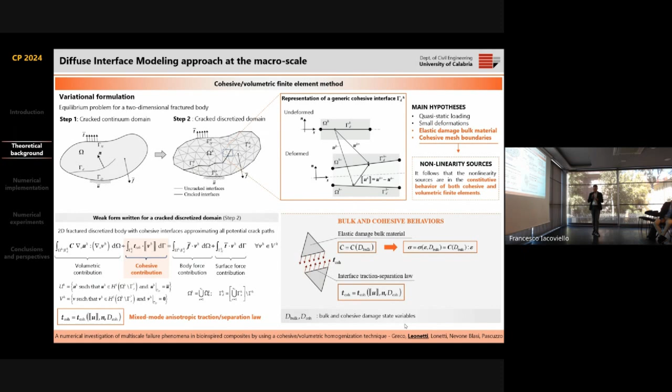In particular, the embedded interfaces are cohesive interfaces, which possess a general mixed-mode anisotropic traction-separation law. Anisotropic means that the TSL, the traction-separation law, depends on the orientation of the macroscopic crack. On the other hand, the bulk elements possess a general nonlinear behavior, such as elastic damage behavior and its anisotropic version.

So the main assumptions of the model are 2D periodic microstructure, well-separated spatial scales, quasi-static loading and small deformations, and a general nonlinear behavior of the constituents at the microscopic scale, so the scale of the microstructure. Conversely, at the macroscopic scale, we consider a homogenized damage model up to strain localization for the bulk elements, and the homogenized cohesive law for the embedded interfaces after the strain localization occurs. So that's why we call this approach a hybrid continuous-discontinuous multiscale model.

So for bulk homogenization, the micro-to-macro relations to obtain the overall constitutive behavior in the nonlinear range are rather well established. There exist some very known formulas, but there are no analogous relations uniquely defined for obtaining the micro-to-macro link for the cohesive repeating unit cell here used for homogenization purposes. The formula for the macrotraction follows a natural definition, obtained by enforcing equilibrium at the macroscopic interfaces, but there is no unique definition for the macro separation in the literature.

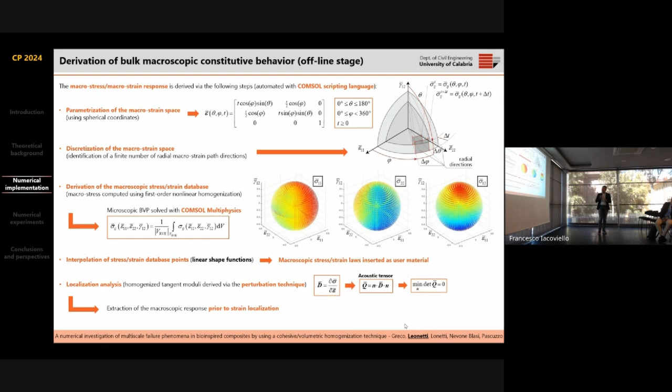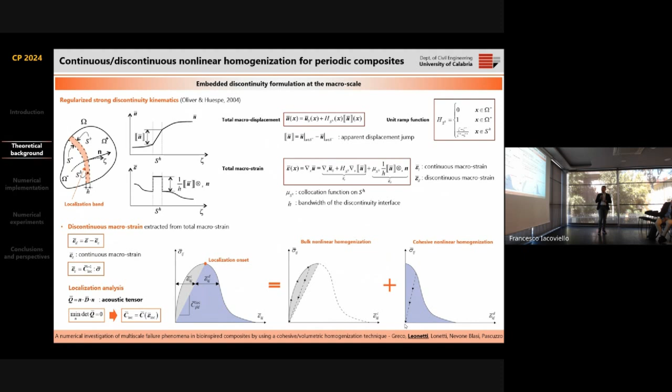Then the interpolation of the previous strain database, and finally the detection of the stable part of the response by performing a rigorous localization analysis, which is based on the singularity condition of the so-called acoustic tensor. This allows to split our response into a stable part, which will be used in the bulk, and an unstable part, the softening part, which is used to drive the interface behavior at the macroscopic scale.

So this is the second stage of the method, that is the online stage, which concerns the interface behavior. This is an online stage because it is performed during the simulation of the macroscopic problem. So the input is the macroscopic displacement jumps, then the computation of the discontinuous macrostrain using this formula, then the computation of the average continuous macrostrain as the average between the two adjacent bulk elements to the generic interface, then the determination of the macrostress on the calculated macroscopic stress-strain database, and then the computation of the macroscopic traction.

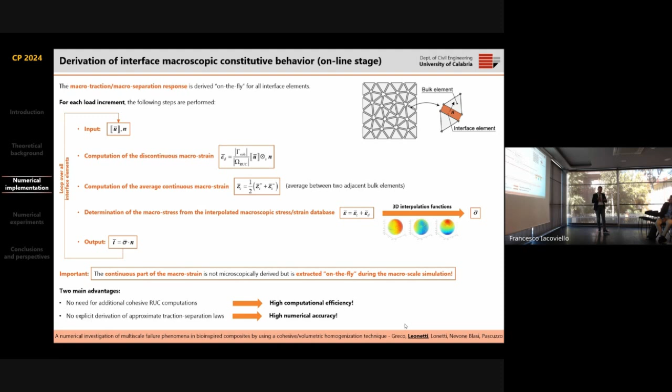It's important that the continuous part of the macrostrain is not a priori derived, but is extracted on the fly during the macroscopic scale simulation. The two main advantages are no need for additional repeating unit cell computation, that means higher computational efficiency, and no explicit derivation of an approximate traction-separation law, which means higher numerical accuracy.

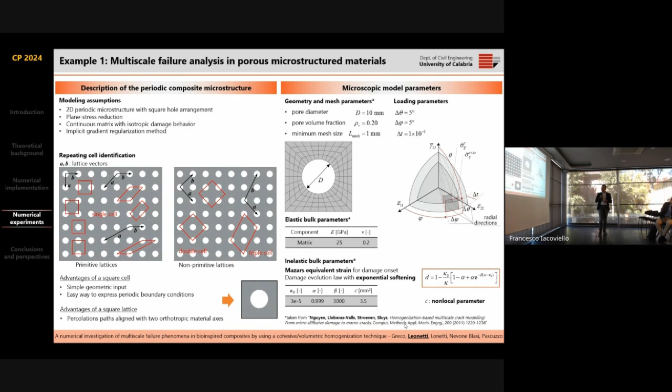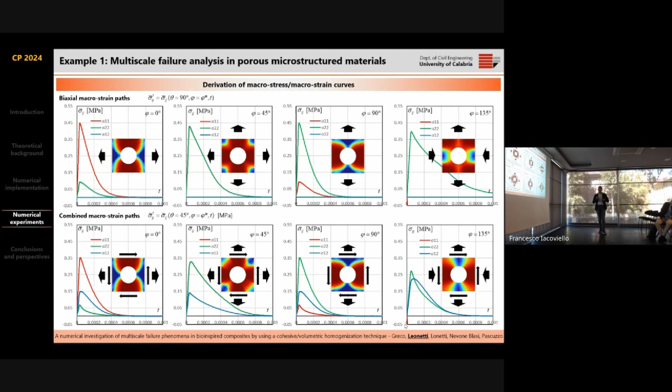So let's go to the main numerical example used to validate the proposed numerical procedure. The first example is based on this microstructure, that is a porous material with arranged holes in a square array. This is the square cell used for our nonlinear homogenization purposes. Here, the nonlinear characteristic of the matrix, which is assumed to be damageable according to an isotropic nonlocal damage model. You can see just an example, the main overall responses in terms of stress-strain for different macrostrain paths involving compression, tension, also shear deformation of the unit cell.

And then we go to the main numerical simulation, that is the so-called multiscale numerical simulation, MNS, which is performed on our macroscopic problem. In this case, we study a simple 3-point bending test on this perforated beam, and the aim is to validate the procedure by means of a suitable comparison with a fully meshed model, that is with a so-called direct numerical simulation in which all the microstructural details are represented explicitly in the problem. So, homogenized versus fully meshed.

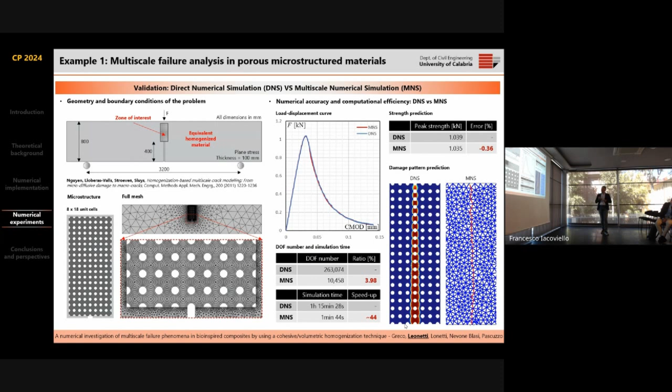The load-displacement curves are superposed to each other with very small error on the peak, less than 1%. But the most important thing is that we reach a very high speed-up value. So a multiscale analysis which is 40 times faster than the direct numerical simulation. Also, the crack path is captured by our approach for mode 1 propagation.

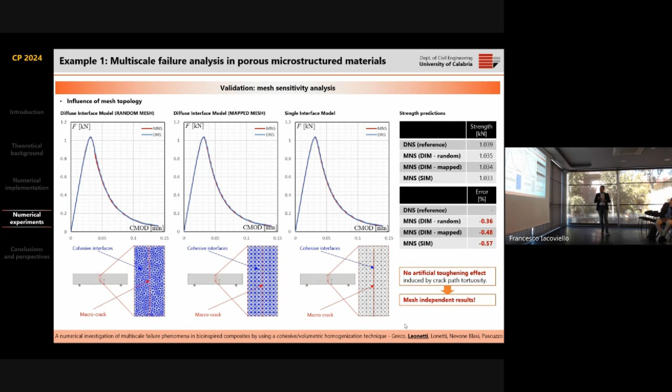In order to better validate the model, we propose a comparison between different meshes, a random mesh and a mapped mesh. The results are in agreement with each other, and they both are in agreement with a reference analysis in which only a single interface is introduced in the model due to the symmetry condition of the test. So, very, very good results in mode 1 crack propagation.

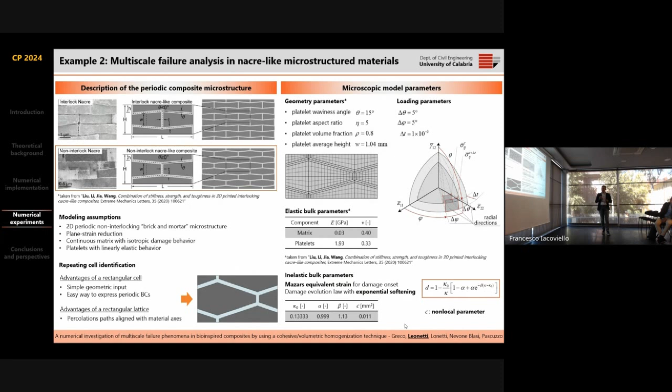Let's go to the second example, which is now about a bio-inspired microstructured material, in particular a nacre-like material with a brick-and-mortar arrangement, which confers to this microstructure a higher fracture toughness due to the possibility of the crack to go through the reinforcing plates. So, same thing. We studied two cases, a mode 1 loading and a mixed mode loading. So, for mode 1 loading, these are the results. Also in this case, very, very small error on the peak, less than 1%, and very high values of the speed-up, 80 times faster analysis.

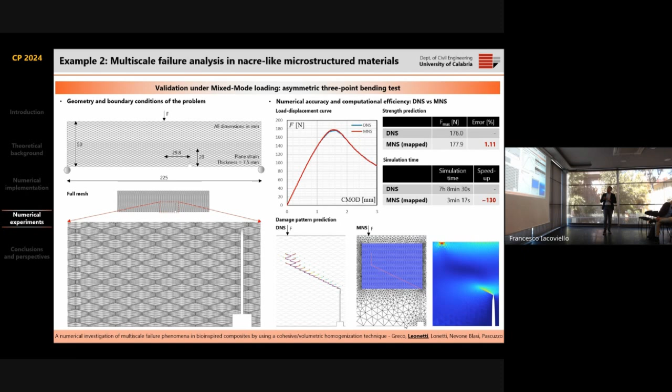And here, a mixed mode, the same test, but with the crack. Also in this case, the MNS and the DNS predict the same result. Also, in terms of global crack path, you can see the direct numerical simulation, the path is this one, multiple cracking. Here, just the main crack predicted with the same angle. And the speed-up value is even higher, 130. So we are rather satisfied by our results, which encourage us to continue this way, proposing more efficient multiscale models.

So, in conclusion, a novel hierarchical multiscale model is proposed for periodic microstructures, in particular for particle composites, based on the synergy between the continuous-discontinuous homogenization approach and the diffuse interface model. An efficient computational strategy is proposed to compute on the fly the overall traction-separation law, starting from the macroscopic sensitive interfaces. The main advantage of the proposed model is to solve completely a nonlinear two-scale problem at the cost of a single-scale problem. The proposed approach has been fully validated by different examples.

I would like to trace some future perspectives for this work. First of all, the extension to the setting of large deformation. This could allow us to better study the influence of the interaction between fracture phenomena and instability phenomena in more complex microstructures, more complex bio-inspired composites like nacre.